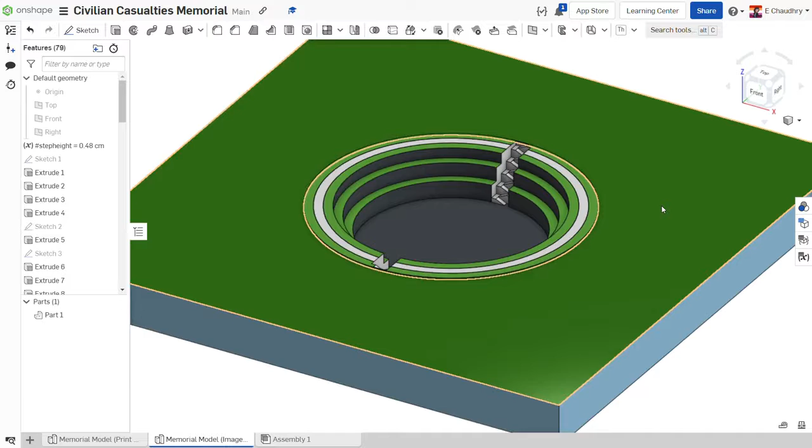The top level is slightly raised above the ground level, and then after that it just goes down with each level until you reach the bottom, which should be about 24 feet below ground level. It's a very tall monument. Or, not tall, deep monument.

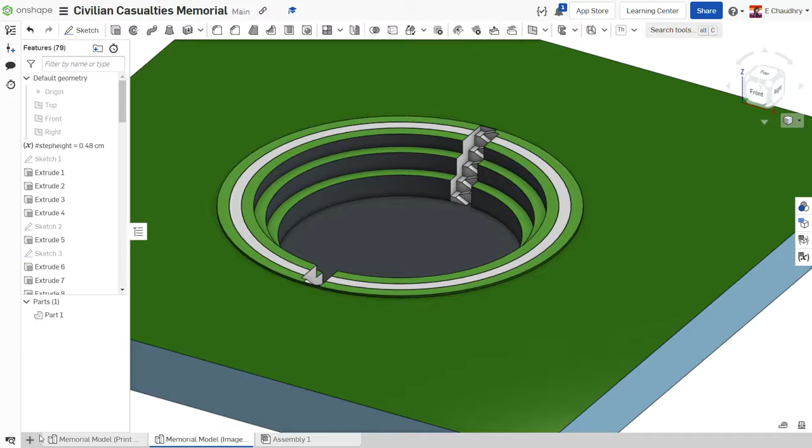So let's go back to the isolated version. As you can see here, there are 3 levels. The top level has a path running around the middle of it, and that's because it's the only level of the monument that you can walk about on.

The green bits of the monument show where the statues will be, statues to represent civilian deaths. I'm not entirely certain of the number we decided on for the top level, but there will be statues on either side of the path, and they will have information alongside them, as well as stuff like anecdotes, poems, all that good stuff. For the lower 2 layers, which will not have any walking access, the statues will just be there to represent the people.

The lowest level will be, as you can see from the darker bits, made from darker material than the top level. Top level is probably just regular concrete sidewalk sort of thing, a regular walking path as well as the stairs.

With the walls and the lower level, we wanted to have a feeling of the void left behind after all of these deaths happened. So we opted to color code it darker, and we'll be using darker materials.

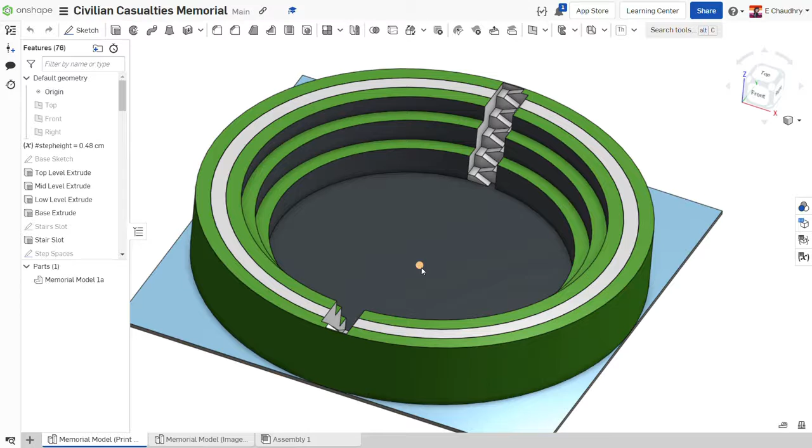The bottom part is sized so that hopefully the people standing on the bottom will be able to see the statues surrounding them from way up higher, which would hopefully create a sort of overwhelming feeling, like, wow, all these people are dead. That's a lot of death, you know?

And the inner walls of the lowest level will be covered in information just on World War II and civilian deaths there.

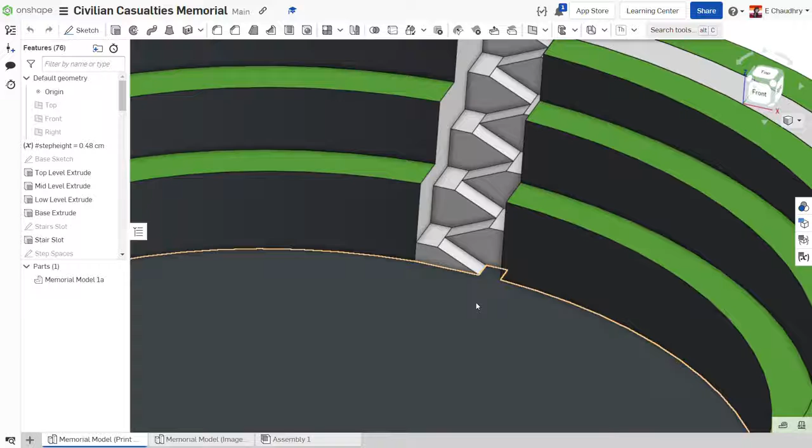The stair design here is designed to be sort of a hybrid between a regular staircase and a ramp. We didn't want to make it a ramp, because any ramp that we put in would have ended up being too steep, and we didn't want people to have to deal with that many stairs.

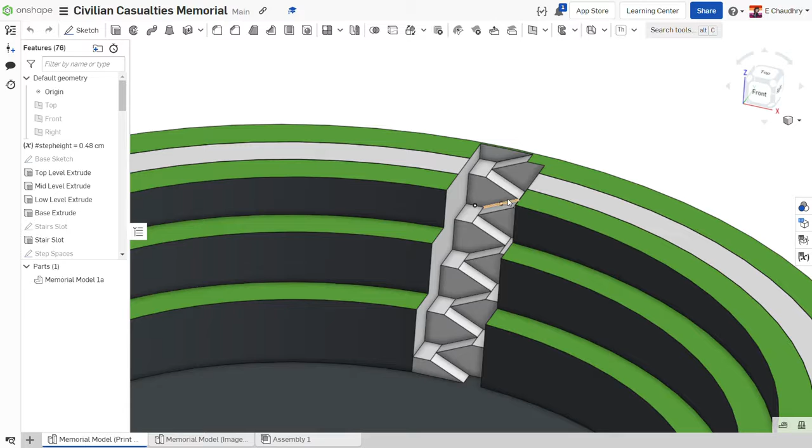Thus, the stair ramp. There are, how many levels is that? 1, 2, 3, 4, 5, 6, 7, 8, 9, 10 levels to get to the bottom, and they're all just short walks up and down the ramp. We didn't want people to be overwhelmed coming into and out of our memorial.

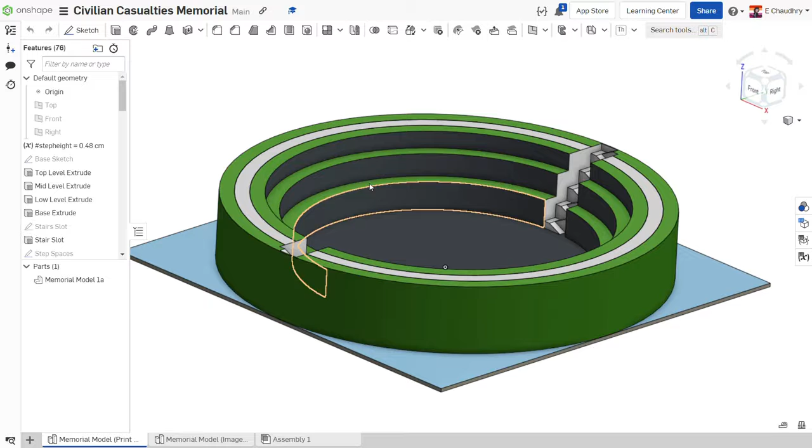With the sizing of the memorial, as I've said before, the memorial is about 24 feet deep, with each of these layers being, this layer about 6 feet tall, this one's 8 feet, and this one is 10 feet, progressing downwards, it gets bigger, leaving more room for statues and headroom for the information on the bottom.

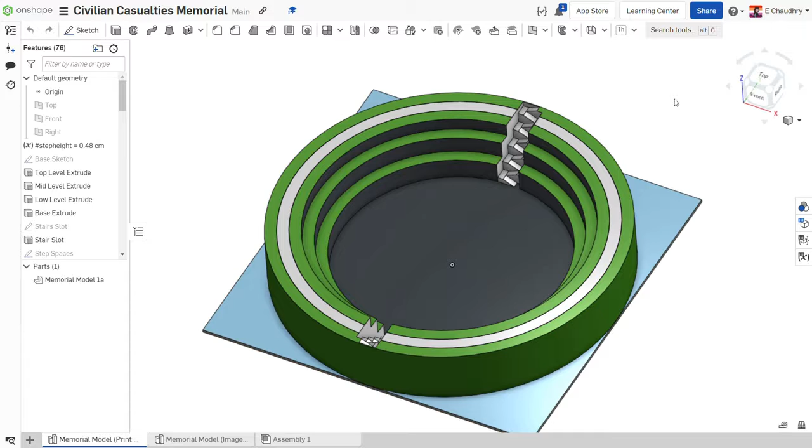The actual width of the memorial, I believe we decided it would be about a football field in length, but again, I'm not entirely sure. I'd have to check the sketches, which I don't exactly want to do right now, because that would take a bit of time. But yes, it's a pretty big memorial, but then again, World War II, big war, big death, big memorial.